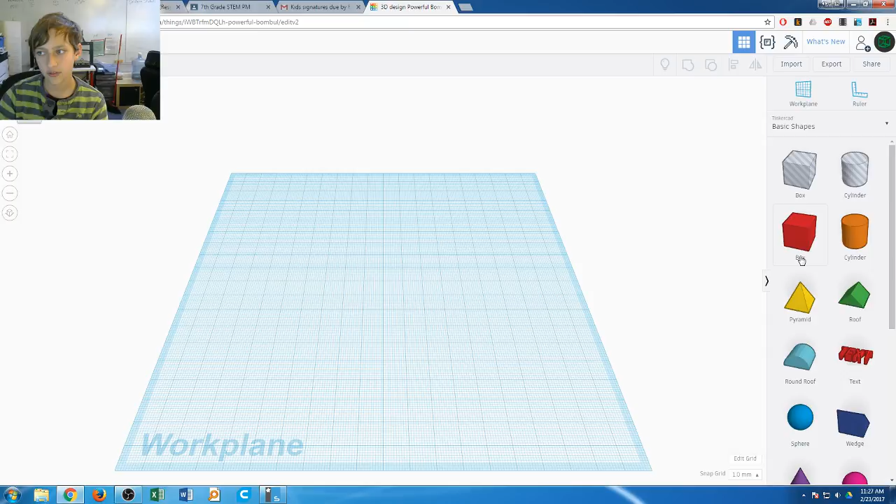So I'm going to select the cylinder, take it out here, and I can either type in 2 and it sizes down to 2 millimeters, or I can size it down myself.

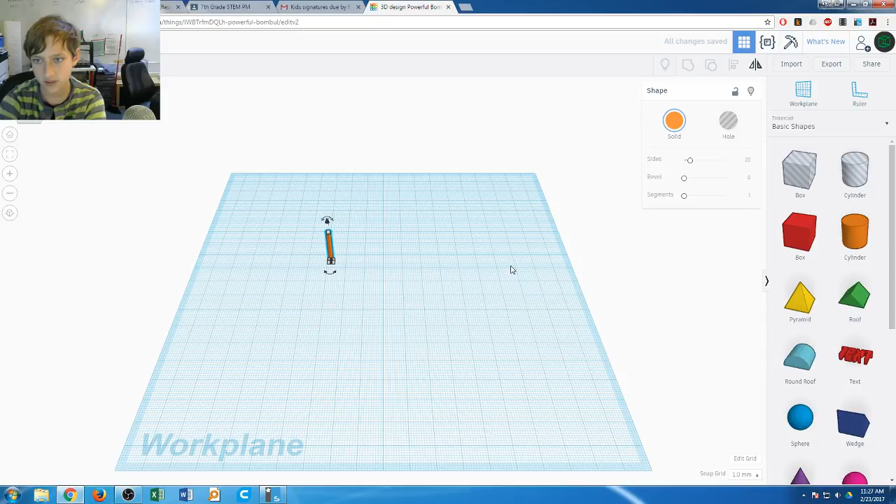And so you can copy by doing Control C and Control V. And you could use the arrow keys for more precise movements.

Then if you grab and hold, you can select all the shapes that are in the square. And also, if it's not as precise as you want it, you can make smaller, more precise movements.

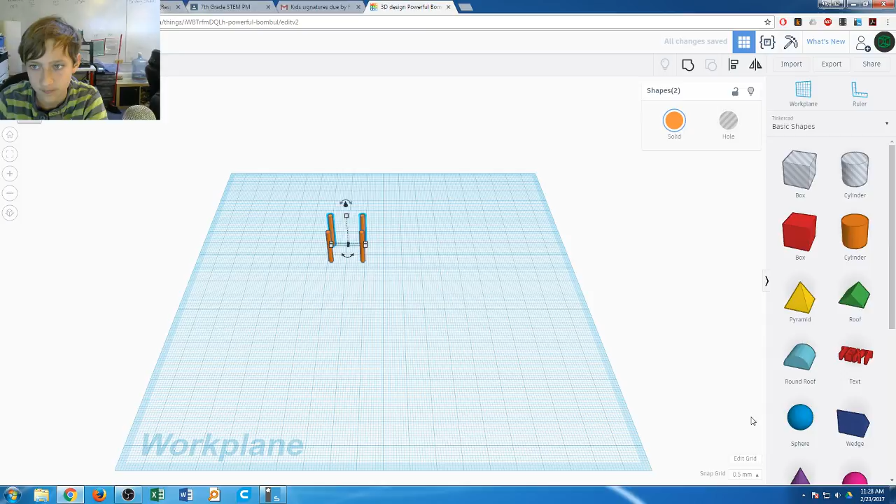And there are a ton of shapes here, and so I'm going to use the box next. I'm going to focus in.

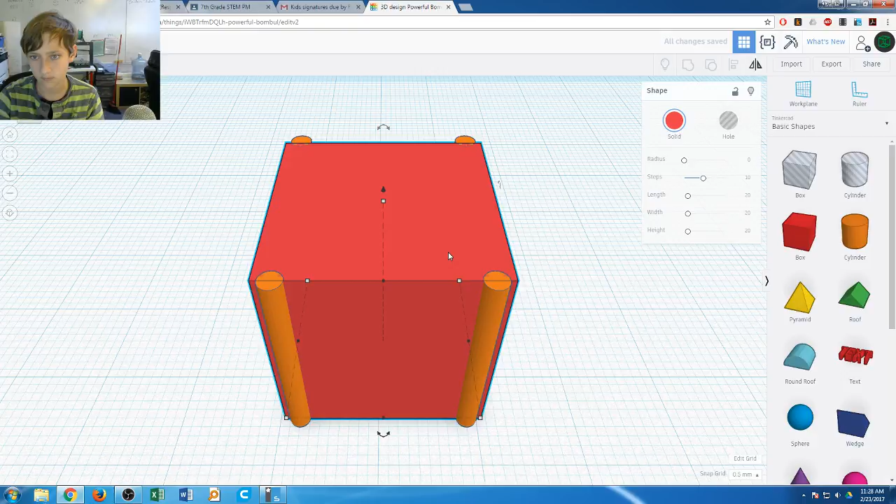And then I can size it down. And then you can use this to pull it up. Then I'm gonna copy it. I'm gonna use this right here.

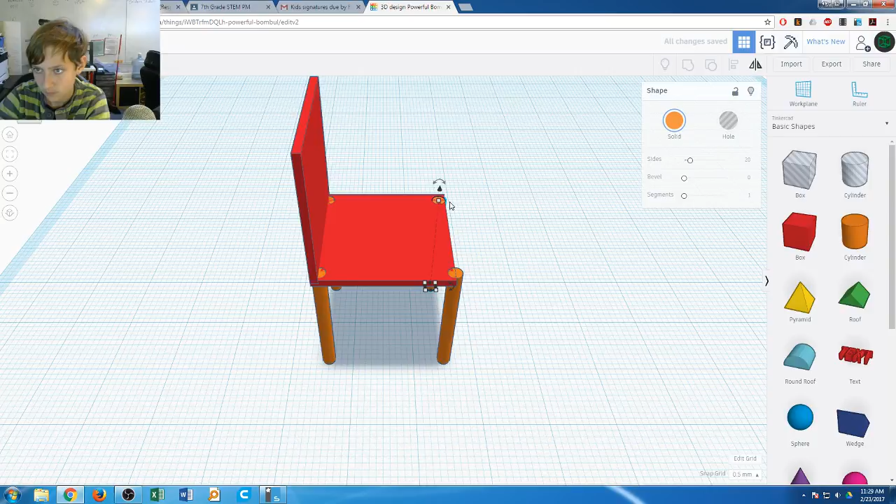And then you have a simple kitchen chair. Ta-da! Very cool. Would you show us one of the more complicated things you've made?

Sure, so give it a second to load. It's thinking.

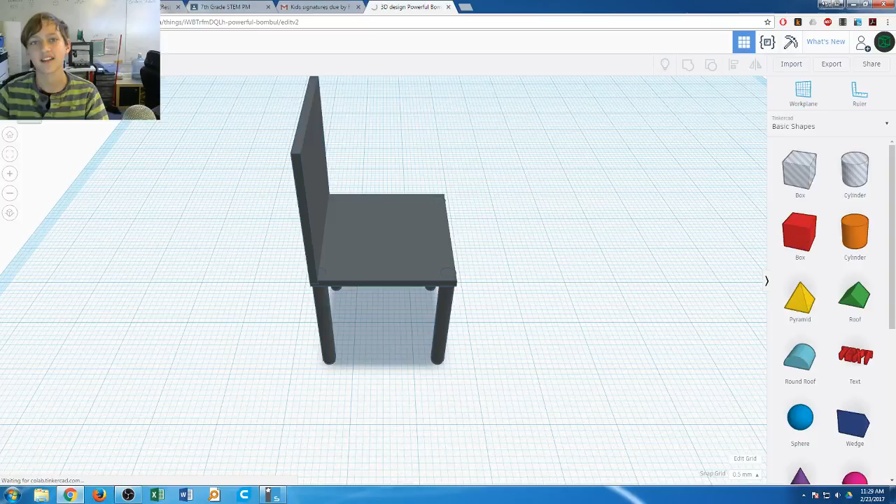Just thinking again. It takes a while to load because there are a lot of complicated shapes involved, but once it loads, I'm pretty proud of it.

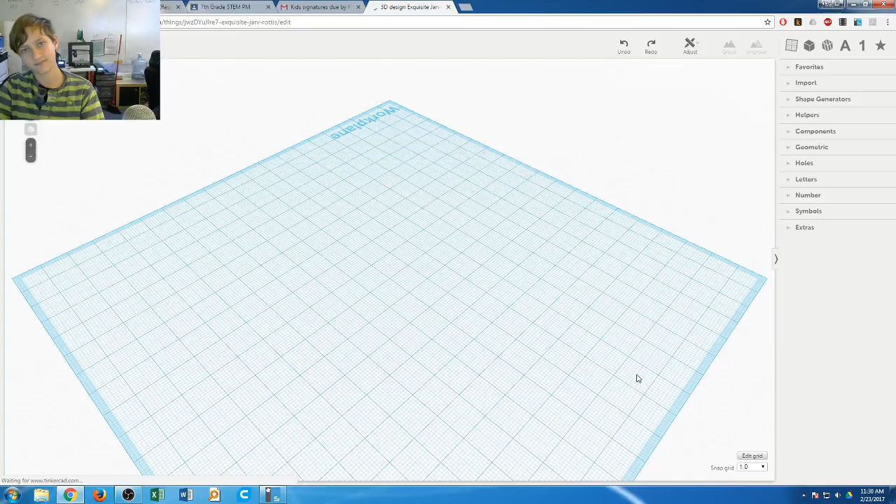No worries. What inspired you to make this? I just gotten a model of the USS Arizona, and it made me think, oh, that would be cool to make. And so I decided, why not make it?

How long do you think it took you to make? About a week.

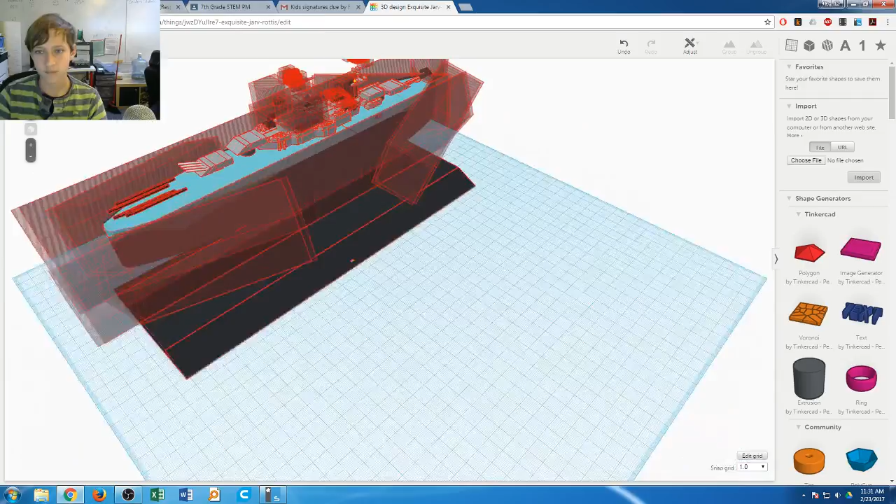It's still loading, right? Yeah, those will eventually go away. I've grouped it all. Oh yeah, it's kind of building right now. It's building itself as we watch.

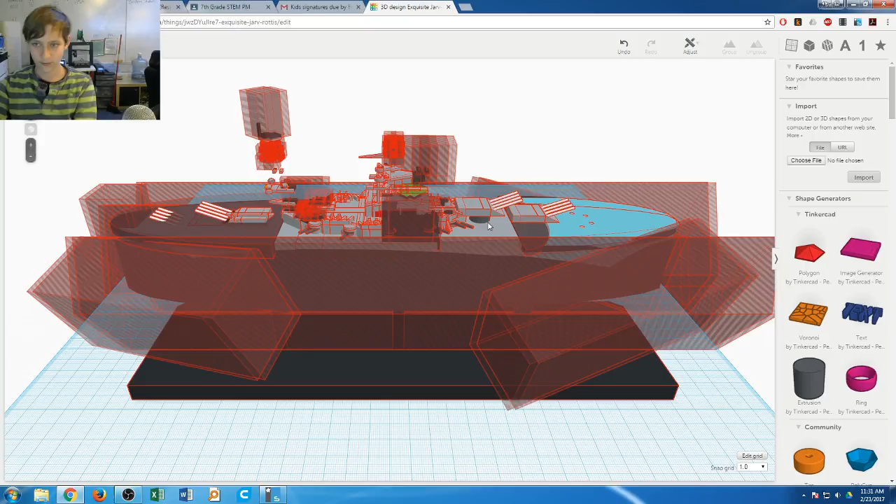Can you explain what those shapes with the stripes on them are? Those are holes, and so when you group the holes with the normal shapes, they put a hole in it. It's pretty simple if you think about it, but it's really helpful when you're trying to build a more complex model with shapes that you don't exactly have.

Cool. We'll let it load and then we'll probably end our video, but that's pretty cool. Okay.

Does it take this long in your Chromebook? A bit shorter. Wonder why it's going so slow. Because this part I'll probably just turn the sound off and be talking over it, but it's kind of cool.

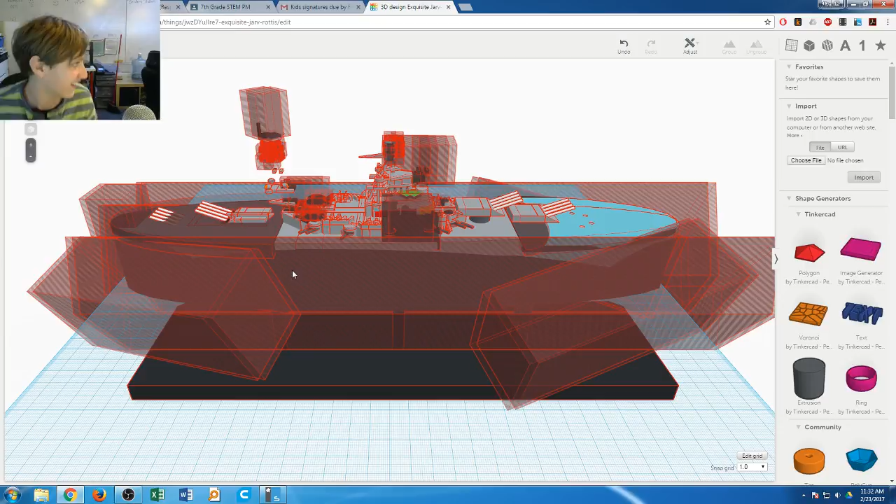All right, well I'll let it load for a minute if you want to go back to your work. Sure, and then I'll just circle it, and then show my work off. Exactly. Thank you. I'll take credit for it too. Say I did it.